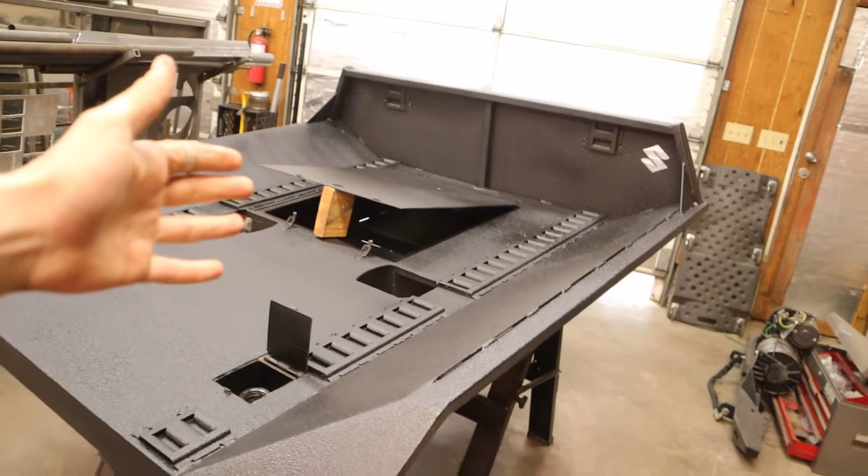So here she is. It's beautiful. It's 5 feet long, which is pretty long for a samurai flatbed. They didn't come from the factory with truck beds on them, so I Raptor lined it. U-POL makes it, pretty good product.

I've never used it before and I really like it. It's polyurethane, rubberized texture, and the only downside is how long it takes to dry. Everything takes a long time to dry though. I sprayed it on yesterday morning and it's still drying — takes 5 to 7 days depending on the heat and weather outside.

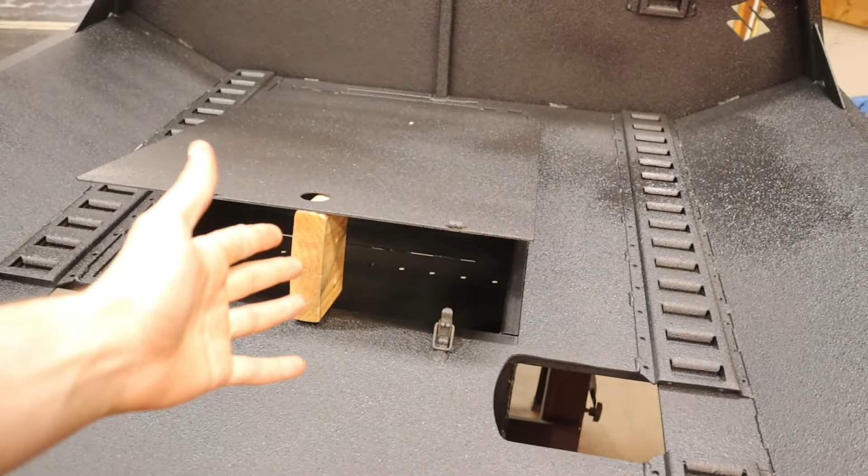It's got a nice internal box, lots of E-track rail, and a cool fuel filler neck which took me forever to make, but that's what it looks like.

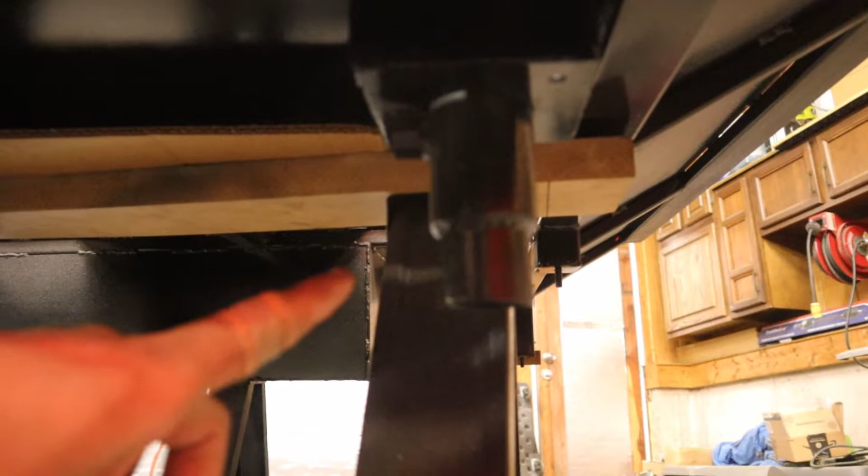A quick note about flatbeds: whenever I see cool flatbeds, they're cool and all, but their usefulness is about a zero. Their usefulness is low because they end up being just a deck like this with no box, nothing, no way to secure anything. So they look cool, but they end up being absolutely useless and really just a pain to put anything on.

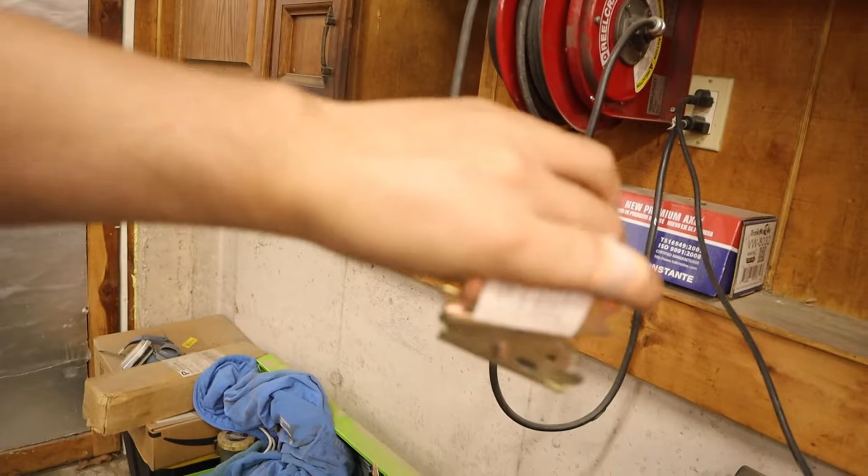So I kind of went all out and did the E-track. It uses these quick disconnect type things, and they work really good. Those are rated for a working load of 1,100 pounds, and I believe it because I've actually lifted this thing up with the engine hoist with those attached at 2 points. I don't recommend doing that. That's pretty much all I'm going to talk about with that.

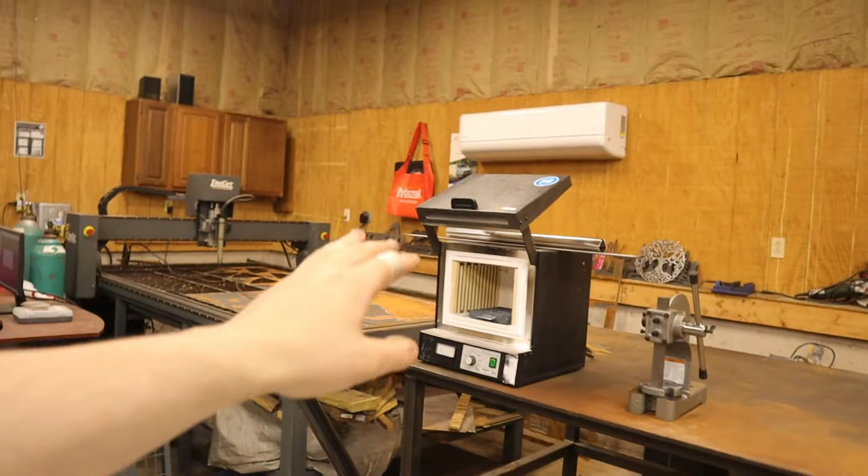A quick little tangent — I did quite a bit of cleaning in here the last day or two. It's obviously still not perfect, but I've decided to use this table as a processing table. So we got a little heat treat oven here now. It's 120 volt, but it'll go to 2000 degrees, so it should work for what we need. It's slow, but that's what I got for now because I can't buy an Evenheat since I'm poor.

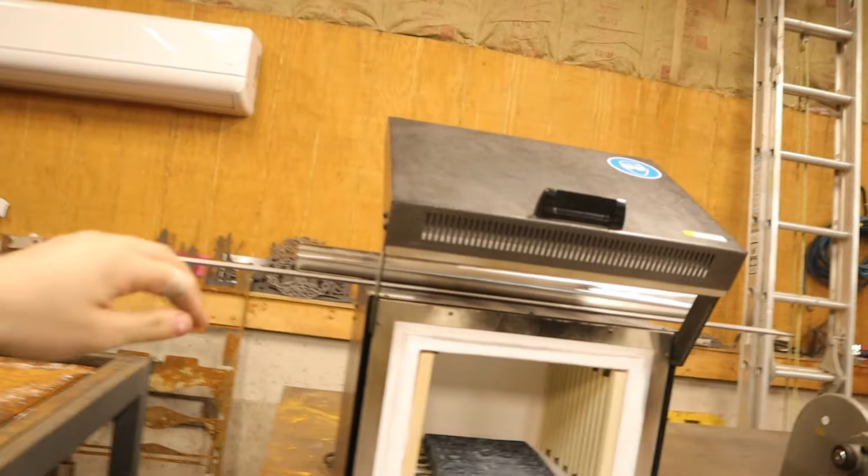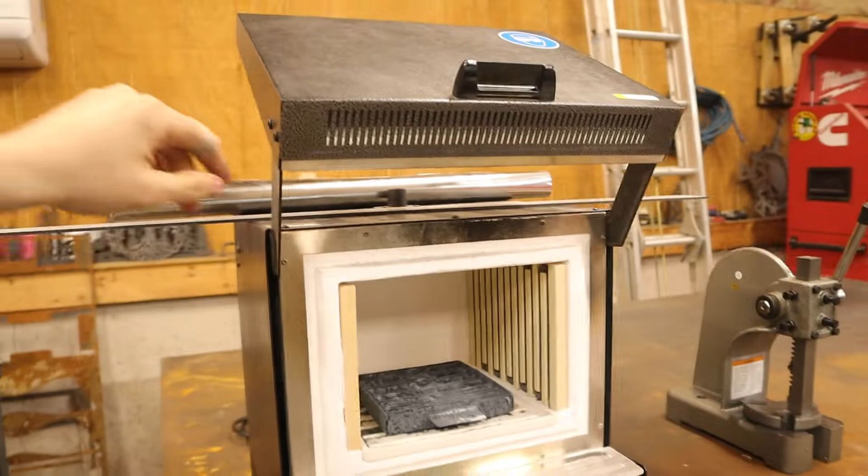Got some 309 wrap from USA Knife Maker — it's the stuff you need to wrap stainless blades in for heat treating so they don't get oxidized. Got a little arbor press, we're gonna make some aluminum plates for it, they go in here. When they're done, they get quenched on the plates. So that's cool, that's kind of where I'm at with that.

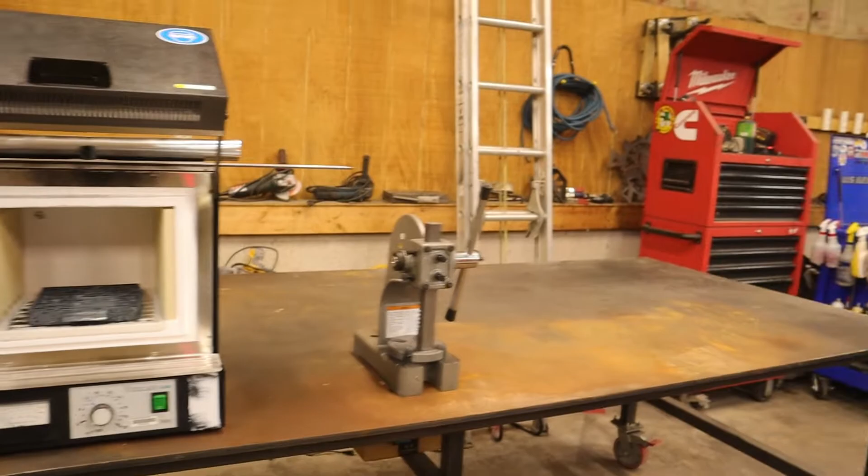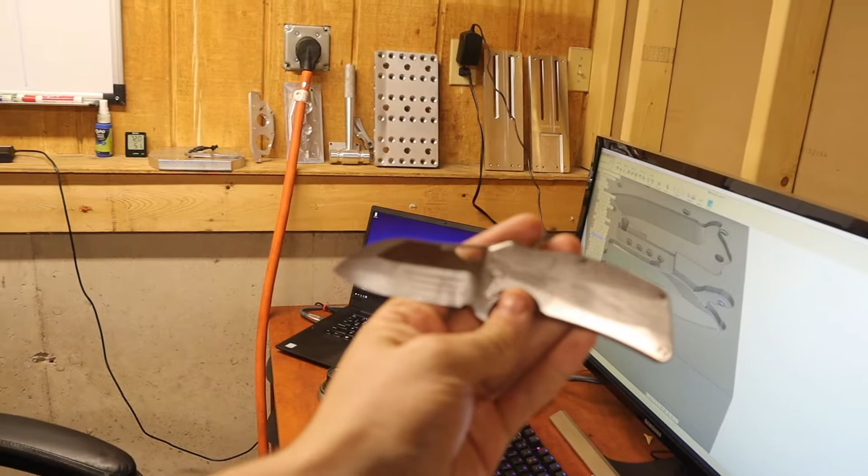Over on the machine, we got 2 of the newest handles done — these are correct. Let's see, we'll talk about what I currently have. The office is kind of a mess, but this is currently what the new knife looks like. This is obviously a rough sketch if you will, but yeah, completely different blade shape obviously. That's kind of where we're at.

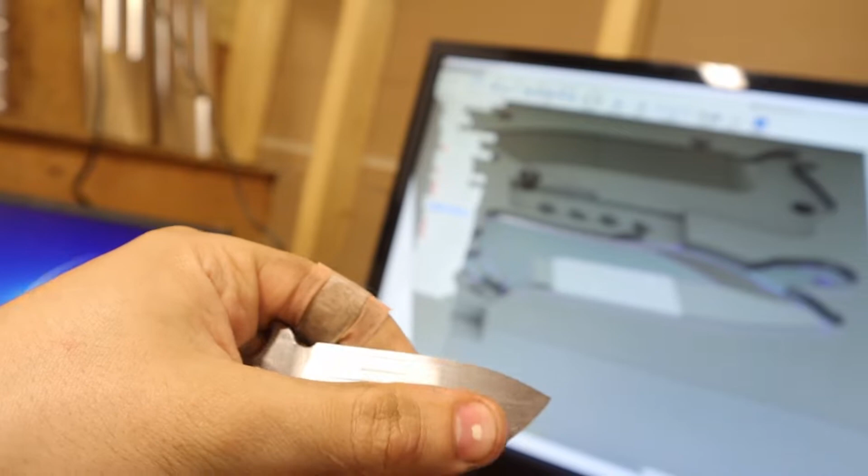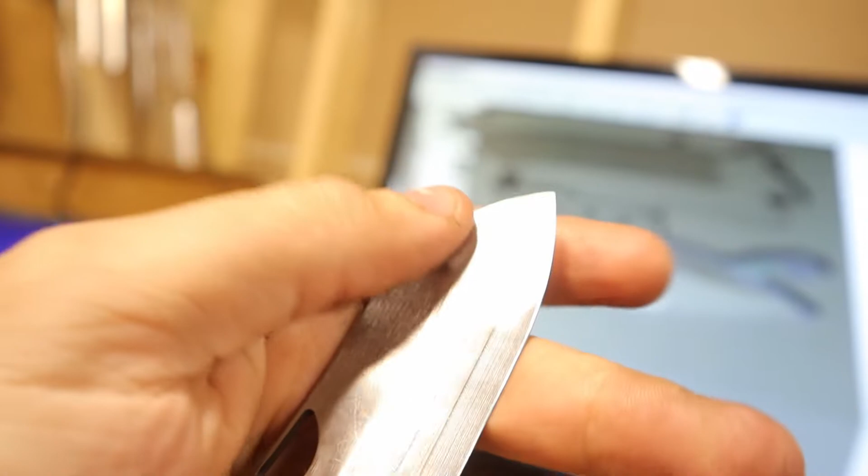Right now I am working on the fixture, the blade fixture for the newer style, for hard milling. This blade was soft milled, if you will, so no heat treating. You can see the finish is good as far as finishes go, kind of — the lines are from it walking on a clamp, but it's not terrible really, and it matches pretty good in the fixture. But I know hard milling is kind of the way to do it.

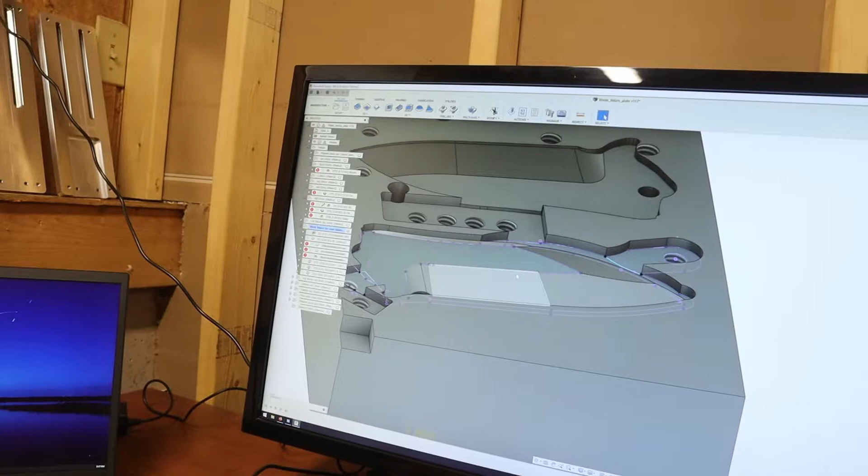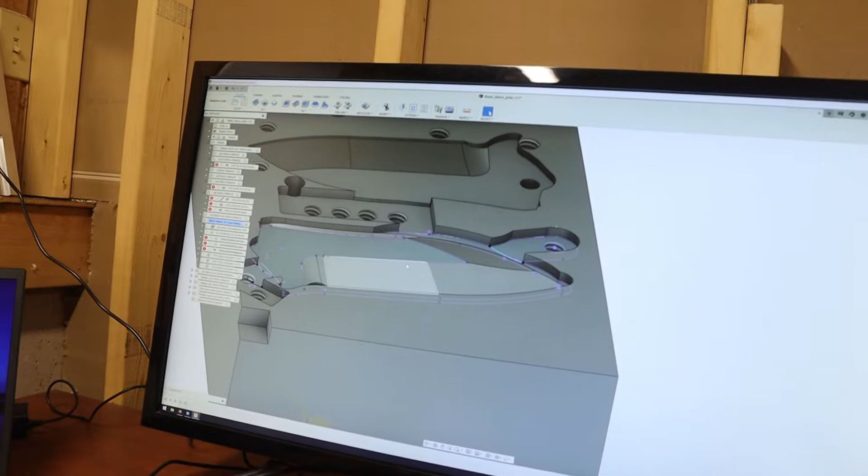So what I'm doing is making the tabs from op 1 follow through. We'll do the rough out, rough the blade shape out, then take that roughed out profile with the tabs and heat treat it, then hard mill every feature including the pivot, because when you heat treat, the pivot dimension will change, and we don't want to lose that dimension before assembling. So that's the game plan. We're gonna cut a raw one out and fumble around with the oven.

Before we start the blade part, here's the newest set of handles off the machine. I thought I'd talk about them and some issues we had.

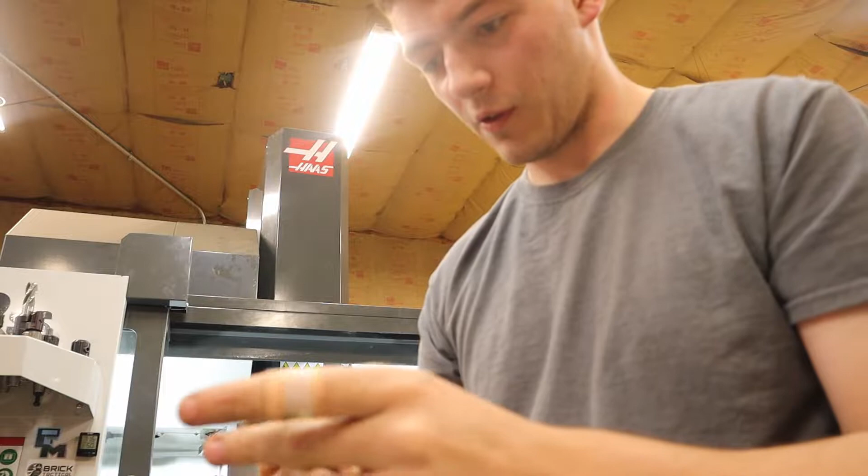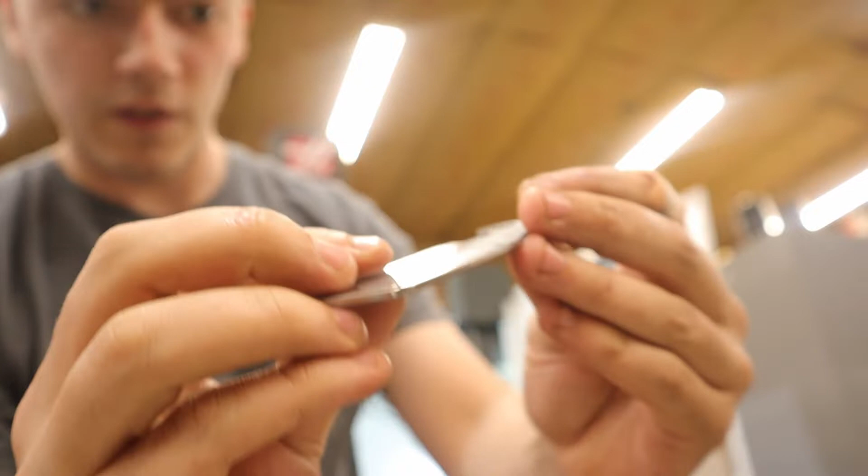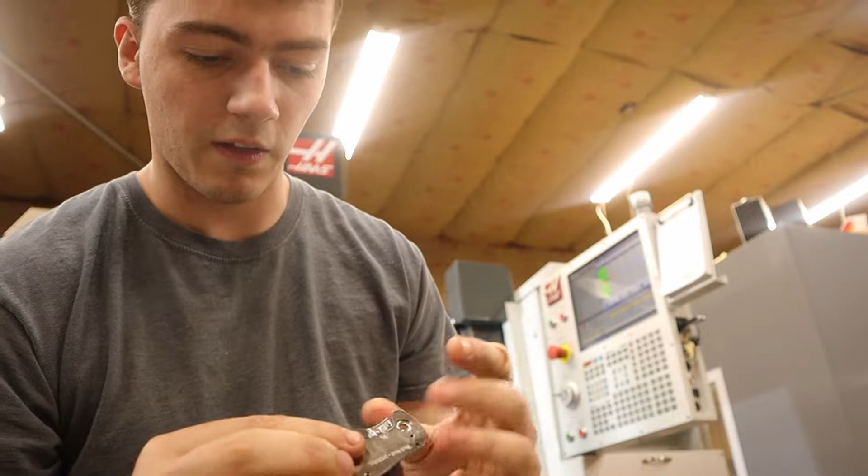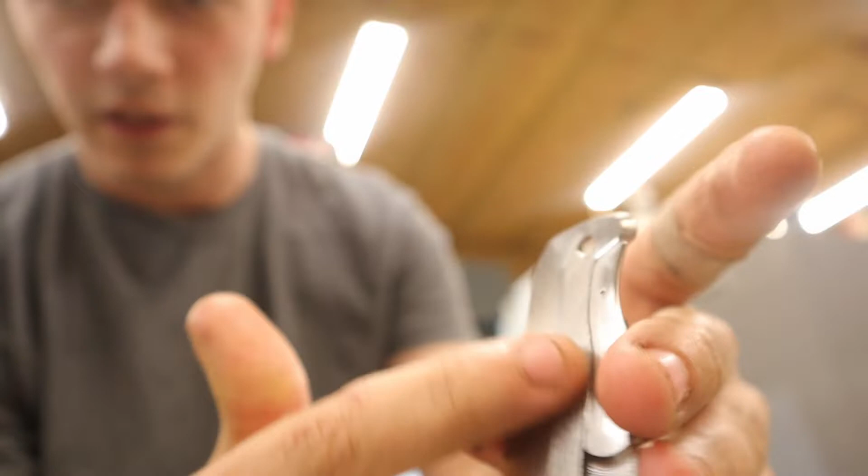First, right off the bat, which I did not see yesterday, the lock bar insert has this tapped hole right here where my pinky is, and there's not a lot of space for a standard piece of hardware, it's very narrow. Getting the tapped depth at the borehole is really difficult, so I didn't get it 100% correct. You can see it poke through when the ball end mill came into the outside contour. We'll have to work on that, but the threads in the hole look good.

I also worked on the chamfering, everything looks really nice on the inside, chamfer-wise. I tried to do an engraving, and you can see it says text test, prototype, and then prototype actually fades away.

This led me to investigate why that might be, and the fixture is off by 3 thou, so it actually dips down at that side. That tells me the fixture needs to be remade, which sucks, but that was inevitably going to happen anyway, because I was going to make it out of chromoly - aluminum is for prototyping and it's served us very well.

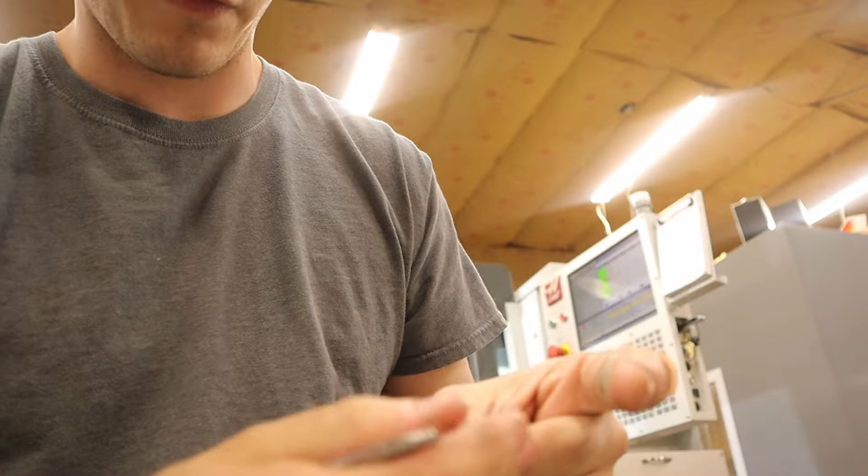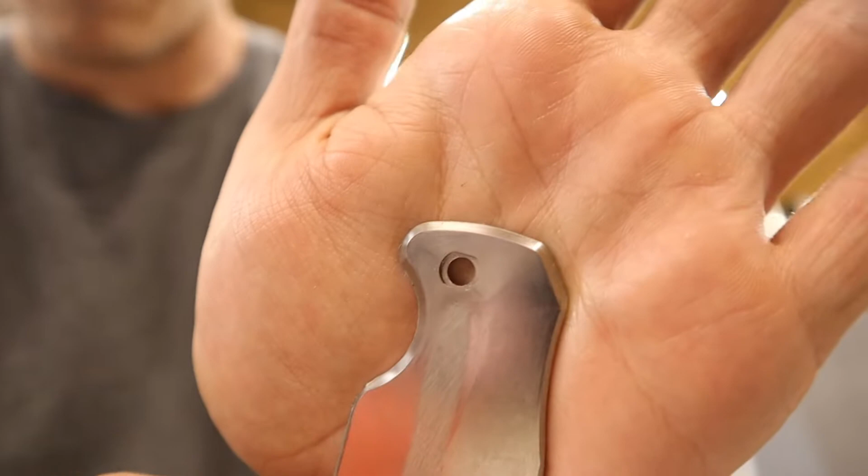The other show side handle came out very nice. There's the inside, very good. Here's the outside - the pivot shoulder has gotten bigger, a flatter area, and having the pivot a little more captive with a bigger shoulder will be better strength-wise in the long run. So that's pretty much it as far as handles go. Luckily these are still very usable for testing, so they're not scrap - not sellable, but they're prototypes.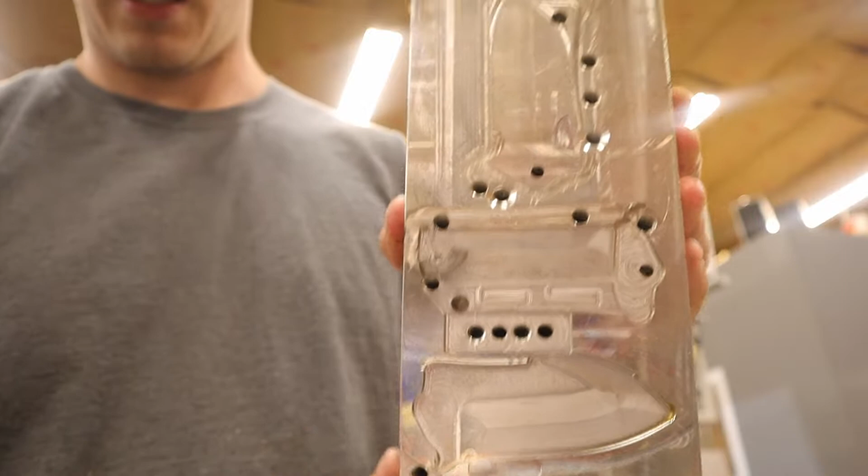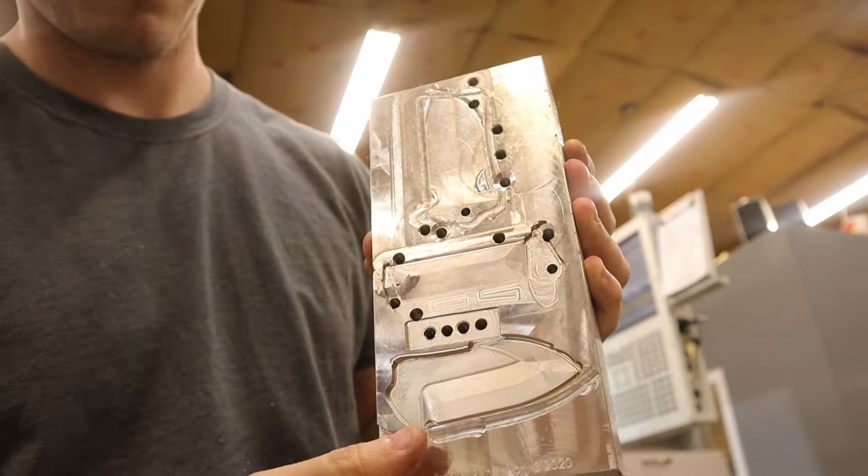Now all we need to do is take our blade fixture, this guy, and cut 2 pockets here and here so we can fit the tabs from op 1, and like I said, heat treat and then hard mill them. So let's do that.

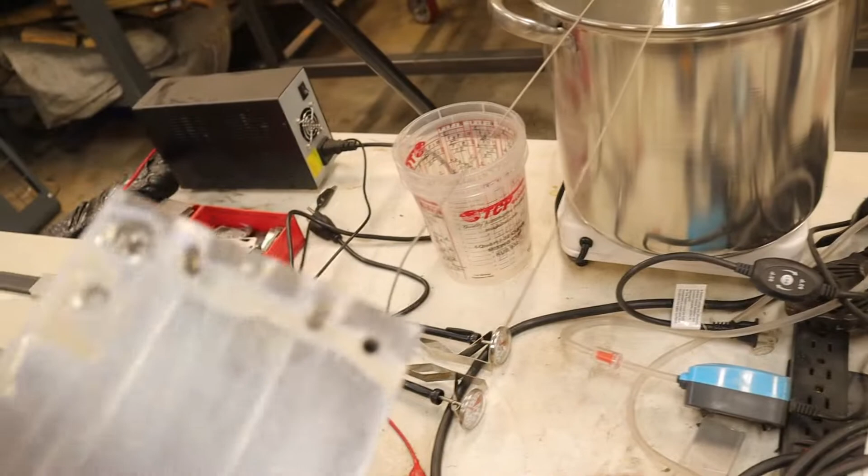I think the reason the handle fixture is off by a couple thou is because of this - see that mark right there? Let's see if you can see that, right in the middle between those 2 dowels. Strangely looks like a bolt head and the threads, doesn't it?

That's my guess as to where our fixture wonkiness is coming from, because on this backside handle op, these bolts stick in here, and I forgot to take them out. Sometimes what happens is they fall down, so you put the plate down and start to tighten it - if one had fallen down, you wouldn't notice until you tightened it and it was risen up. Those 1/4-20 bolts put a lot of down pressure on the thing, so it smushed one of the bolts in there. The only reason I noticed is because it was cut in this weird groove, and I thought that thing's not sitting flat. So yeah, small mistakes lead to problems down the road.

So yeah, okay. You know, I was thinking, if you took a drink every time I said 'so yeah,' you'd be very hammered before the video got to the halfway point. Anyways, enough tangents.

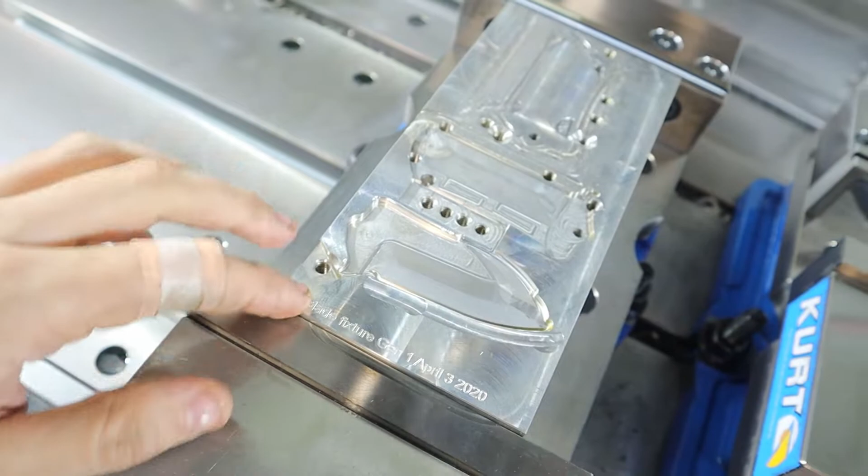So this is the blade fixture. G55 is set off this corner, precision machine corner if you will, so we know that's good when we set the G55 there. Let's cut these pockets.

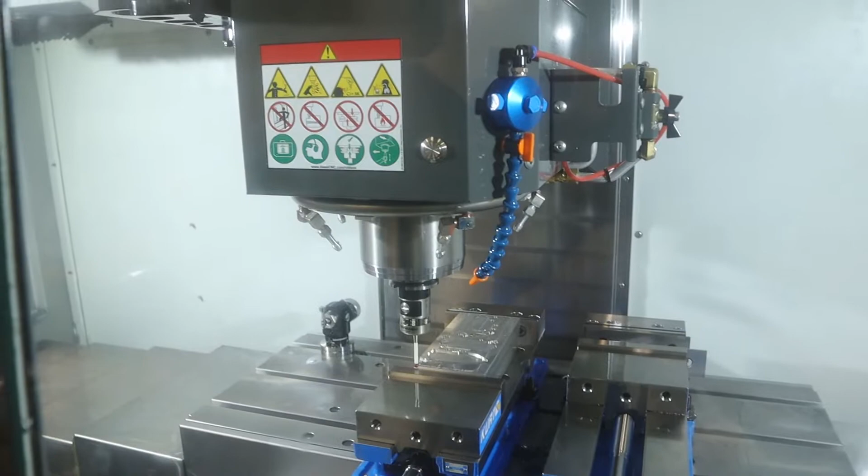Alright, cool. I just set the machine up and we're gonna go ahead and do this adaptive. I have to ramp the machine down and then bring the spindle up to speed, because if I don't, my machine actually shuts off from some voltage issues I have - we won't go into it.

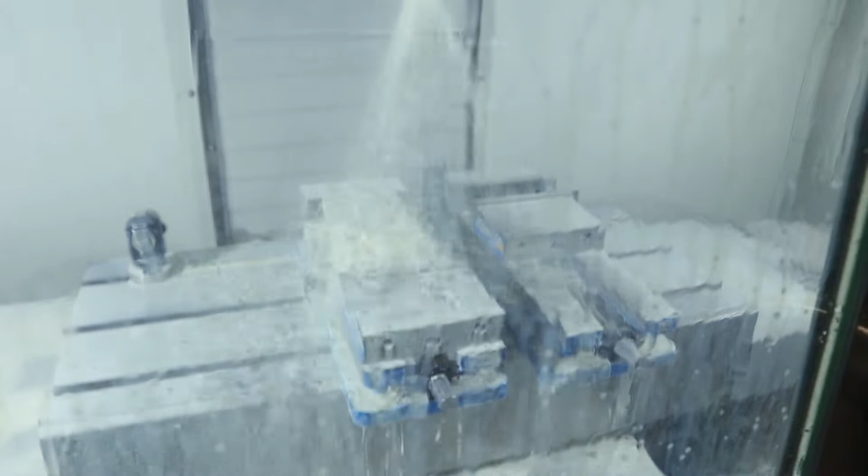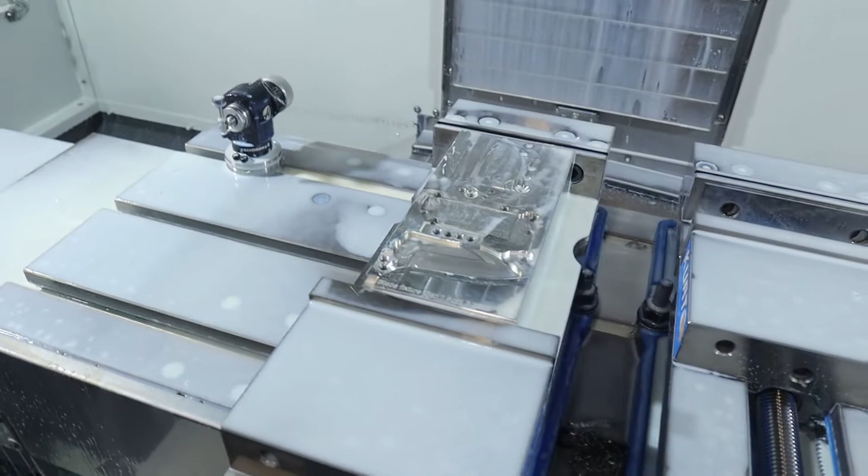Alright, I'm curious to see if this worked, because one of the pockets on the side, or the tap holes on the side, were pretty close. I think that'll work. This is what I'm talking about, it's like really close to the edge.

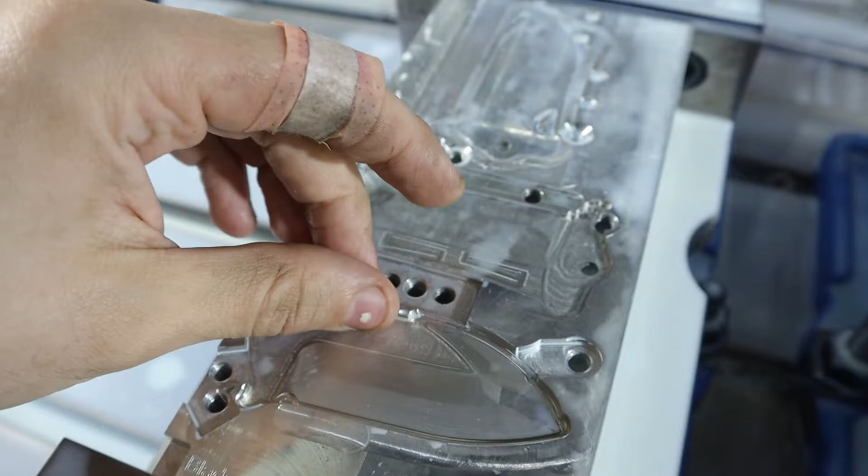Cool, I think that'll actually do what we want. Alright, let's see if we can figure out this roughing out strategy now for the blade.

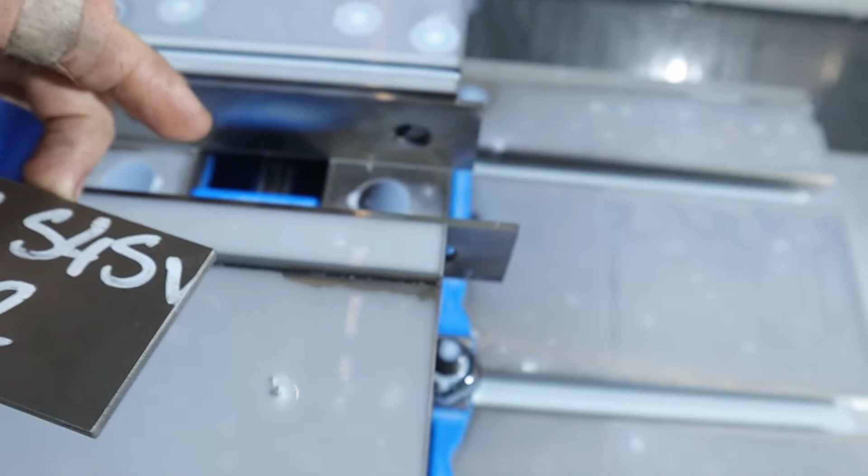Okay, we got our piece of raw material, a 4-inch piece of S45VN. We're gonna slap her down in the machine here, but make sure your junk is not covered in chips, so she remains nice and flat. And by junk I mean the parallels. Oh no, that's not what I wanted to do.

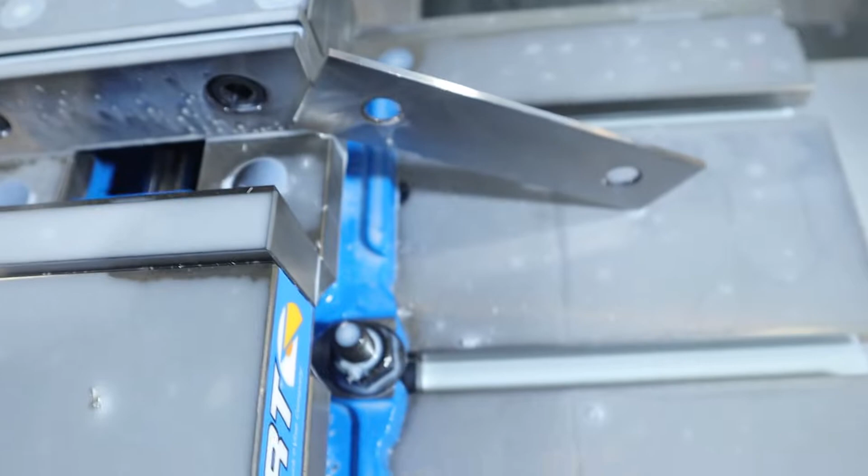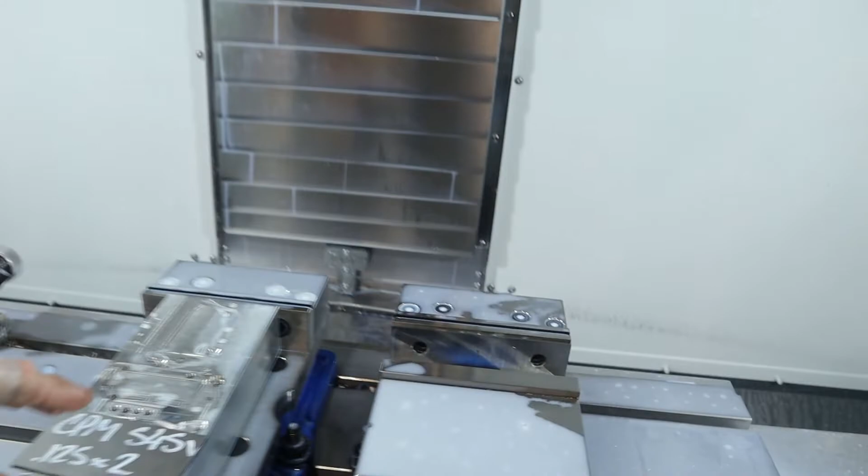That's how you put a dent in your table. Yes, okay, not bad. As I was saying, don't put dents in your table, it's not good. So you got our raw material, then you just hit the go button and go. I'm just kidding, tighten her up.

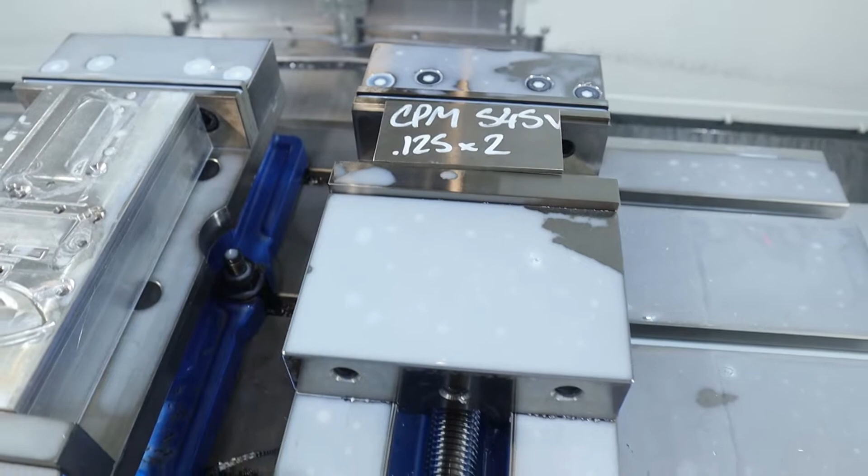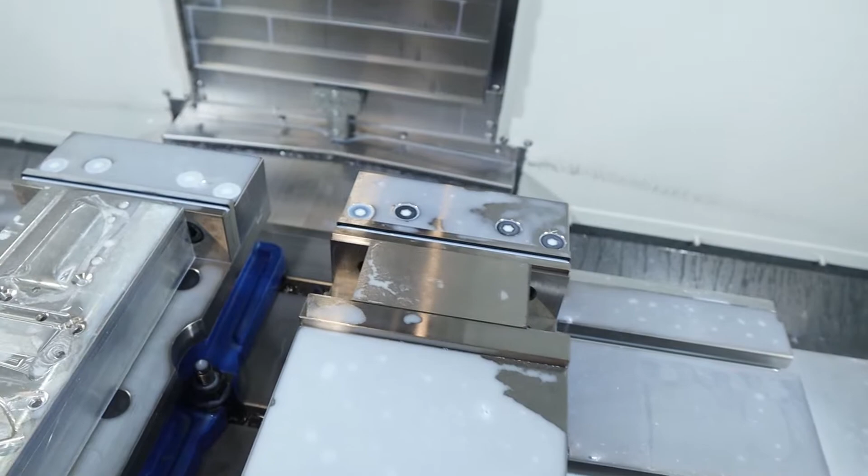Okay, cool. Give her a little snugness. That's actually not the side I wanted to be on, because I filed this side. Make sure you deburr the edges when you want this to sit flat. And I just put a little bit of pressure down, nothing crazy.

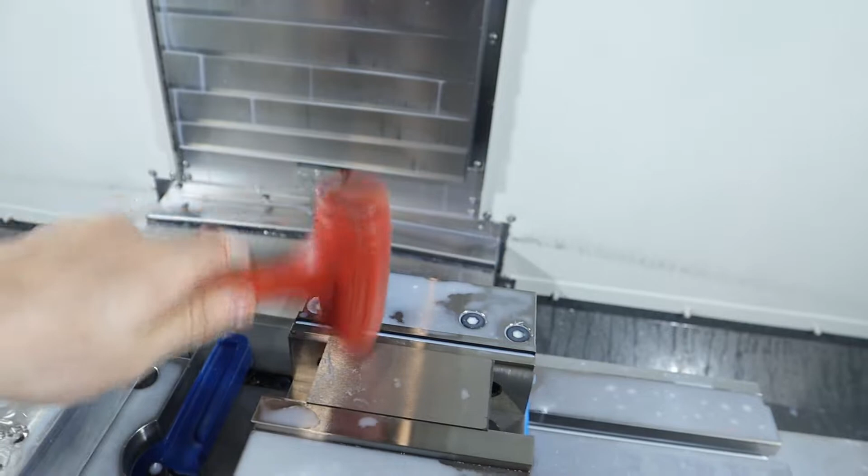Then I take a rubber mallet. I guess the mallet is rubber. Tap. Sometimes you can hear it when it seats.

And the way I have this programmed right now is G54 is located somewhere in that vise. But if you use Fusion's probing routines, we can actually just set G54, adjust it from the last known G54 position. So that's what it's going to do.

Always scares me when the probe flies to the part. But it's basically going to, based on the last G54 I had, update the G54 based on the center of the part. So you basically tell it to go to its certain travels, and it'll over travel and do all that, and it'll just reset G54 to the center of that part, so we're always good.

So I don't always have to probe it, as long as G54 was close to what this G54 needs to be for the next job. And the Z height doesn't change because it's the top of the parallels. So yeah, it's good.

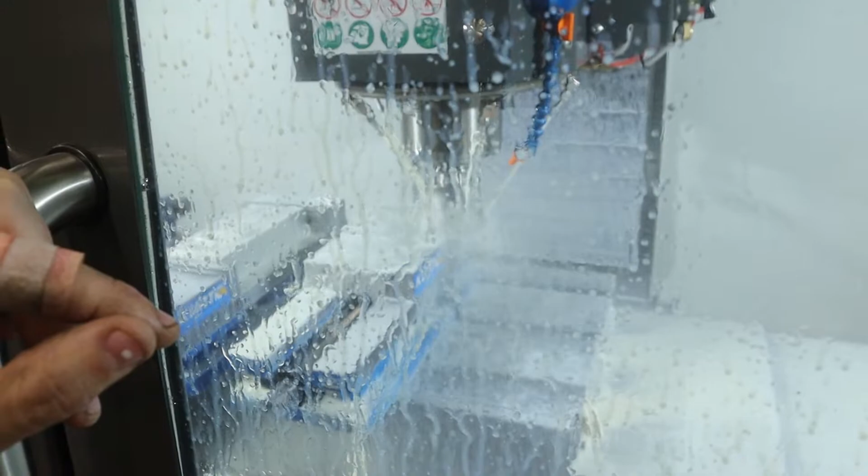Come in here and face this thing. Get very close to the parallels. And I need to come up with a new way to do this, because this isn't the best, there's definitely some chatter. So I'll come up with something for the next iteration of all this.

Yeah, it's pretty painful.

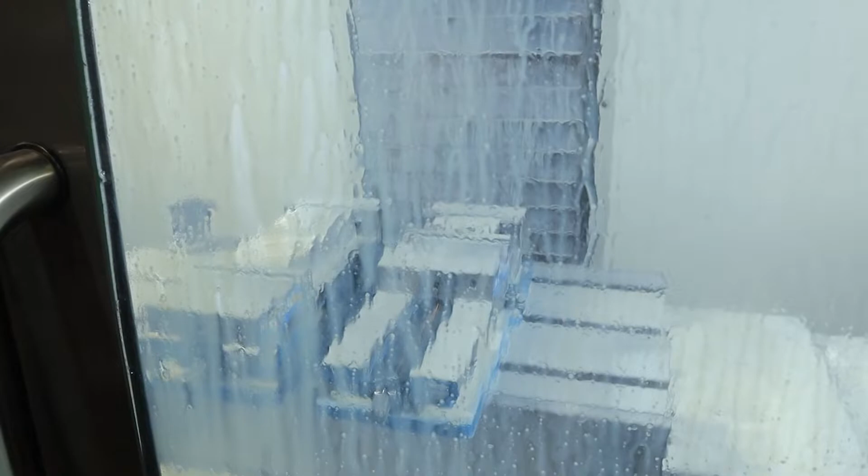And we're basically just going to drill, spot drill, and then contour out for the 1/4 20 hold down holes.

Definitely could speed up some of this process for sure, but it works for now. It's better to have it work and be slow than be fast and not work very good.

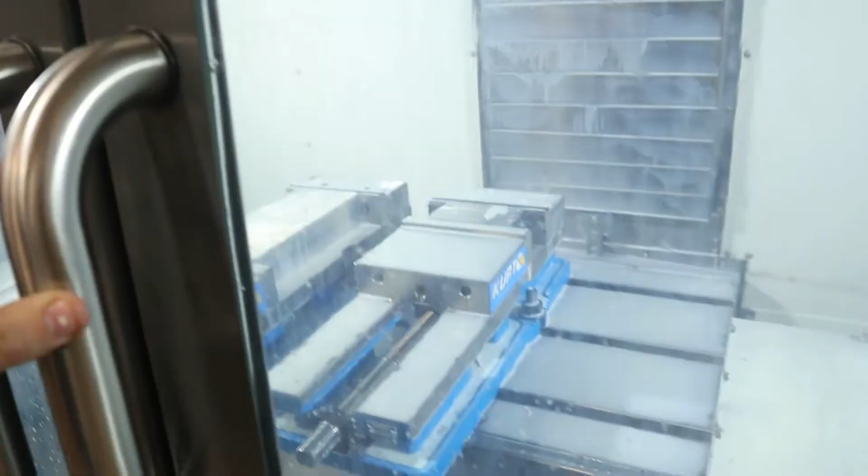Oh yeah, it's doing its tool breakage check. Okay cool, it's tool breakage, and so what we're left with is the 2 hold down holes, and they get located right there.

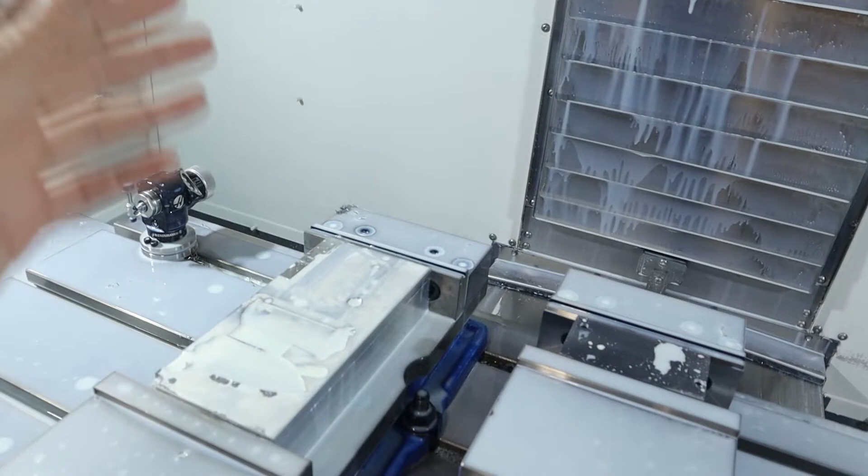So we're going to take that, put that on there, rough it out, and then we'll take it off, and then we'll heat treat it.

Okay, oven's warming up. It's a 120 volt, so to get to 2000 degrees it takes an absolutely astronomical amount of time, but that's working.

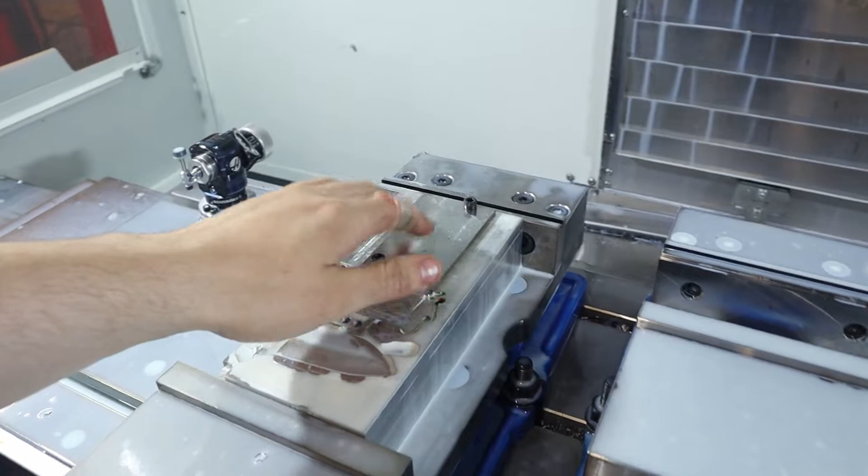I made sure to turn off machine shallow areas, otherwise it would want to step into the actual bevel. So this will keep the tool just on the outside profile of it. So that should be good.

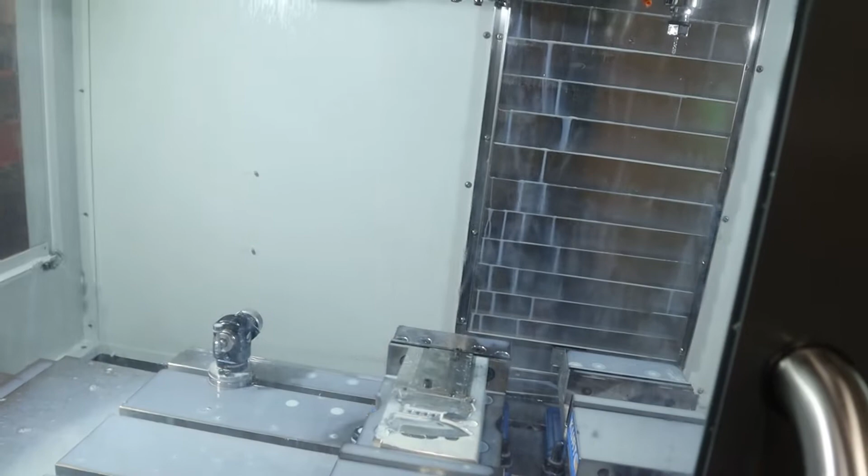I'm leaving 20 thou radially, and I think that'll be enough in case it grows. That should give us plenty of room for contouring and all that on the hard milling side. So I'm using a 3/8 4 flute, pretty stubby.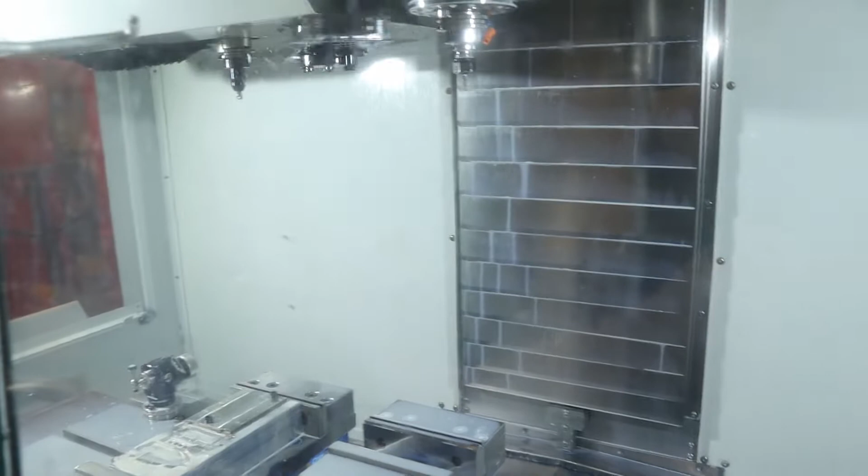Oh, that's weird. I must have it flipped the wrong way - I was wondering why I cut immediately. Hold on, let me flip it. That's why they do that poka-yoke thing where you can't flip things on backwards, but I usually had that 3/16 hole from doing the soft milling, and that's why I got it backwards. But here it is on the right, and I'm glad we caught it, because otherwise that would have been a whole waste of this S45VN, and this stuff's not cheap.

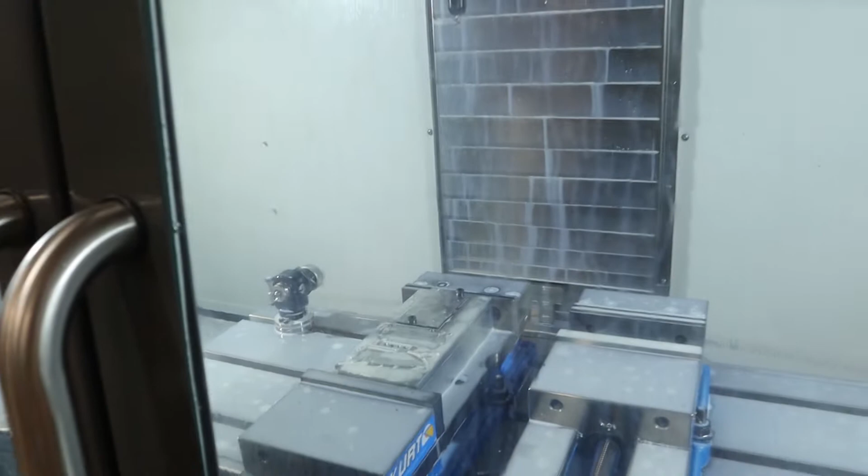Alright, roughing done. Took 8 minutes. Nice clean profile we got there. So let's pull it off.

Put a new band-aid on for my awesome cut. That's a huge cut, more like a lopping off of my... I won't get into it.

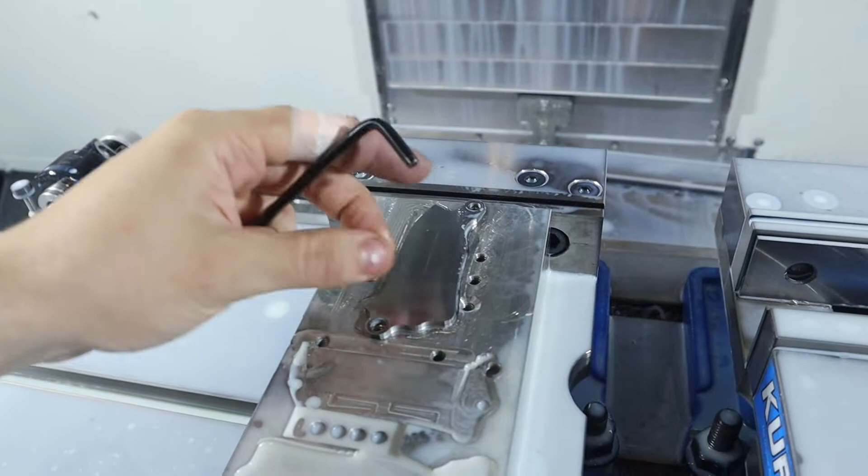I'm not sure why, but I always like the look of the roughed out profile. I don't know, there's something about it, you know? Well, minus that part. But yeah.

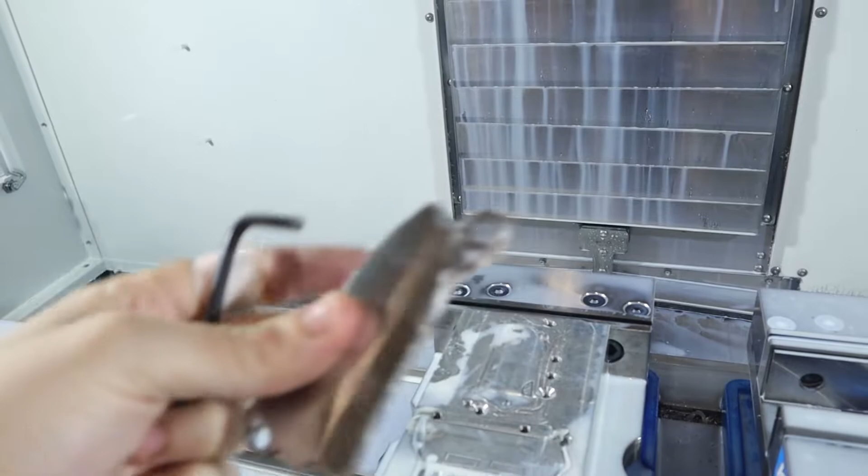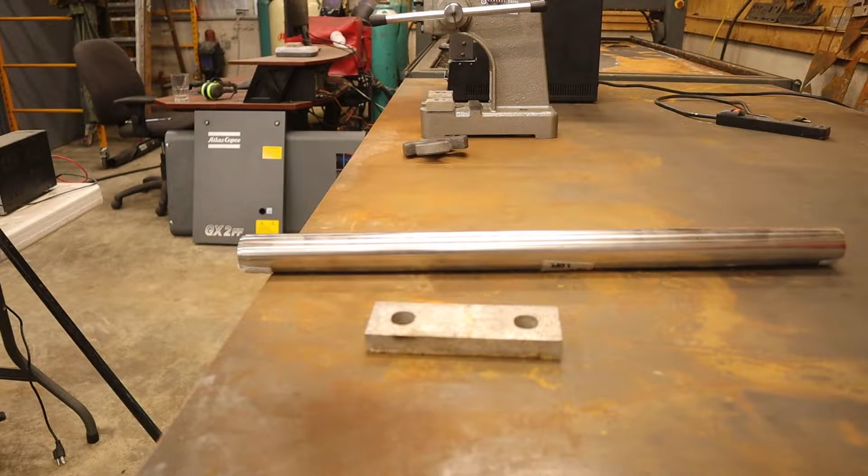Whoa. Okay, we need to learn how to wrap these things now, because if you wrap them incorrectly, oxygen gets to the blade, and if oxygen gets to this type of stainless, the heat treat's pretty much no good. So yeah, let's fumble around with this roll of 309, but first let me deburr this thing.

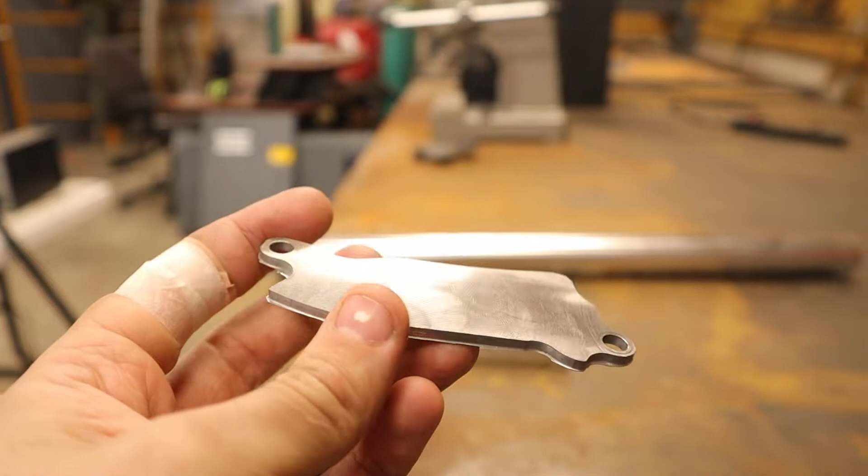I get it kind of deburred. I think that's a symptom of the end mill being dull.

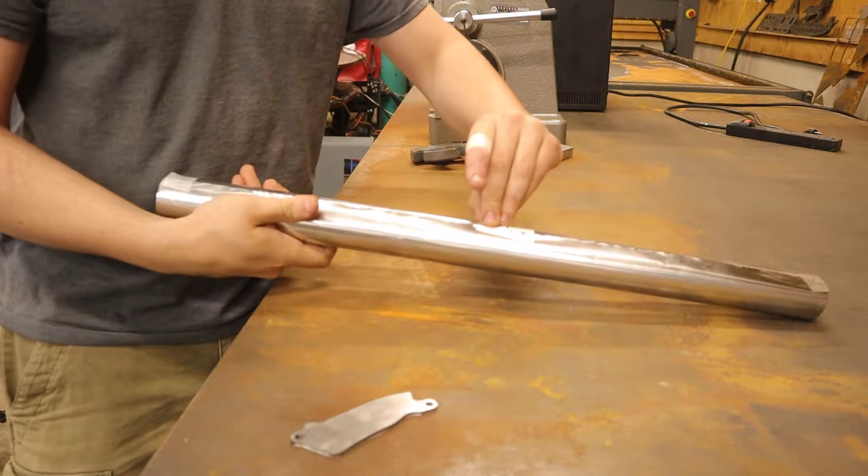I am not entirely sure how to do this, but we will learn together. We will fail together. I hear this stuff is extremely sharp, so I'm all about cutting myself, I'm sure that'll happen. Maybe we'll go put gloves on.

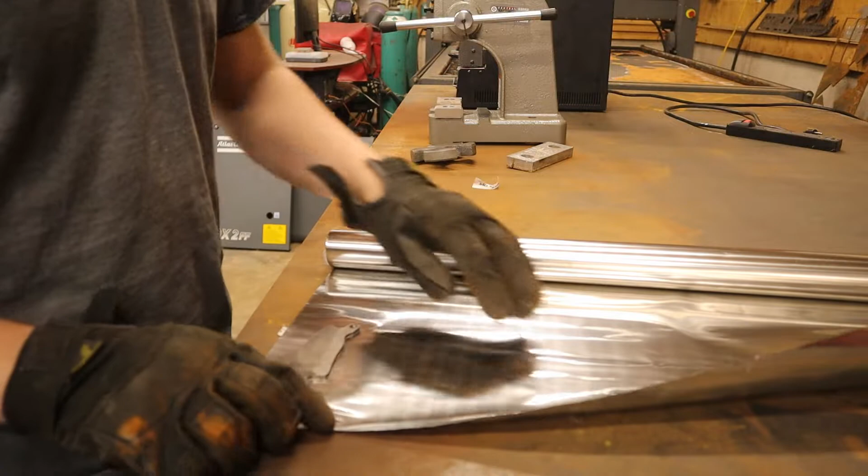It looks sharp. Okay, so this stuff is very thin, obviously. This is new territory for me, obviously.

I don't know where my metal shears are. That would have been really helpful. It's kind of annoying. Okay, that's fine, we'll use these side cutters.

So I think what I want to do is obviously have a nice amount of stainless to be able to do the thing. So I'm just going to draw a nice square. Sure.

Alright, I'm going to go find my shears because those are not going to work. These are shears, right? Let's see if this works. Oh, this works really good - I should just be using scissors from now on.

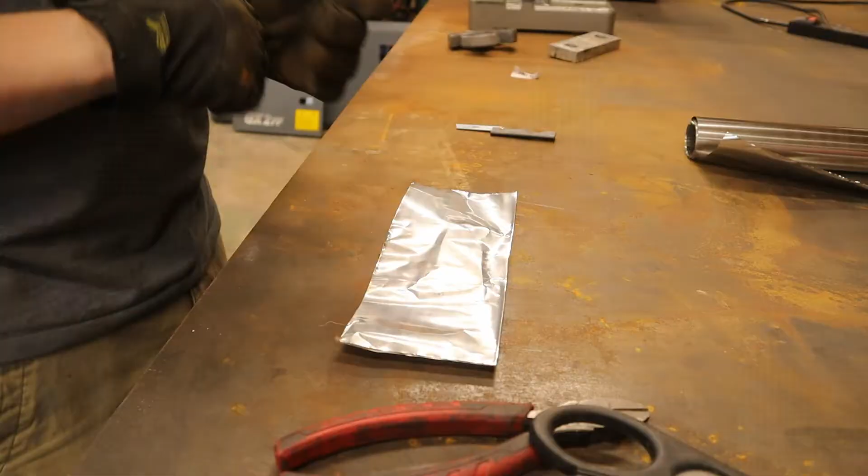Alright, cue the part. I'm pretty sure most people fold over to the front and roll it over, so maybe that's what we'll do. We'll do this, and then we'll kind of... Okay, yeah, see how this might work. So we'll do this.

Man, I've been gone for like 15 minutes, and the oven's only at 1500 degrees. That's slow. Okay, as I was doing, what was I debating? Oh yeah, corner. Well, I think we should do the sides now. I guess we'll do like a tight wrap on the side first, like this.

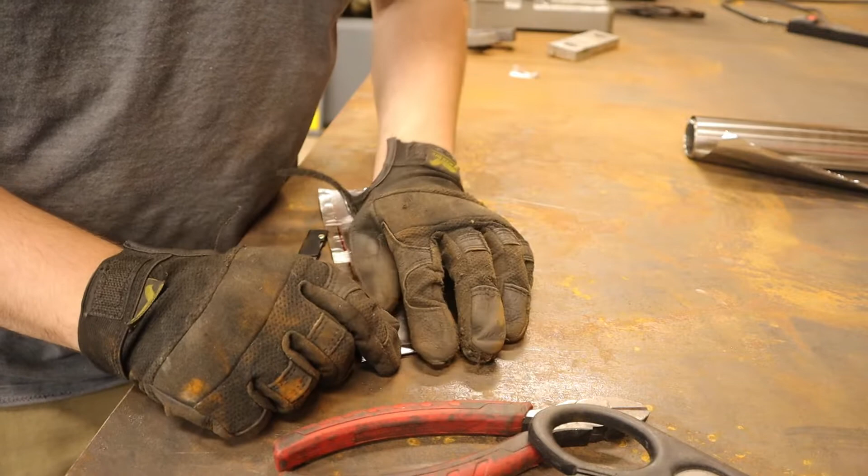Oh, you know what, I forgot baby powder. I heard that's a thing, so they don't stick. Huh. I'll be back. No baby powder to be found in the wife's supplies, so we're going in dry.

I think that means the blade's going to stick pretty hard to the packaging, or the foil. So I guess that's just something we'll have to deal with when we get there, which will be in hopefully an hour.

Oh no. See, if you've never done this before, and you watch somebody do it who's done it a bunch of times, it looks really easy. But then you step in there and do it, and you ain't got a clue what's going on, like I currently look like.

Obviously you want to be careful not to... Okay, I think this is my best attempt at it. I'm not entirely sure how it could get any better. I mean, this is obviously the best piece of work I've ever done.